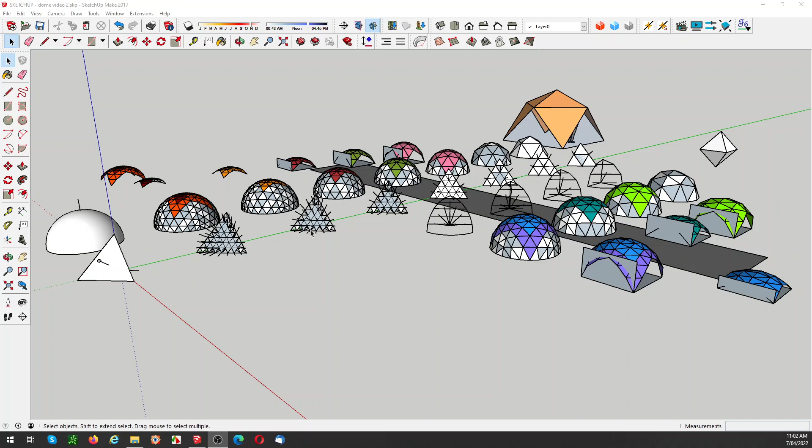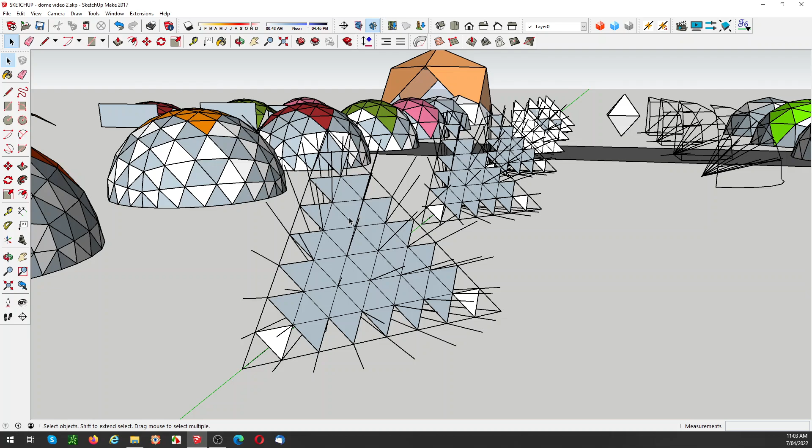So everything on the left-hand side is generated via the method I'm circling here, using the divided triangle and the grid that you can create, and what I call the porcupine or the line array, to create the structures. Not dissimilar to this, you could almost call it a hybrid system, where you make a semicircle, a quarter circle for the three axes, and then join those points of change across and create your divided lines, effectively creating a grid in that manner.

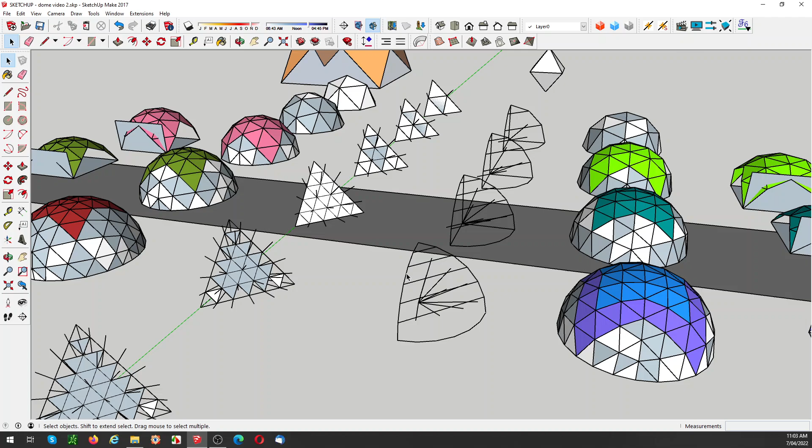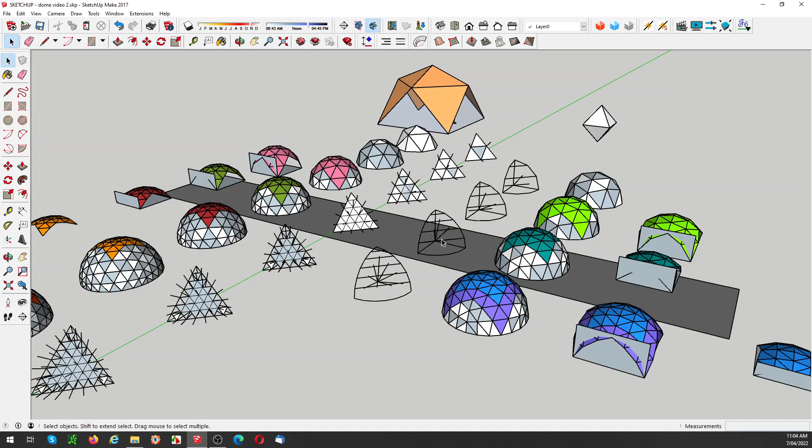Now, we've covered that in a previous video, and there are also other methods. The reason I chased down this particular rationale was that depending upon the frequency, you'll wind up with one of the frequencies, and it turned out coincidentally, and probably no real surprise if you knew what you were doing, that the 5-frequency dome of both types wound up having the support leg, what I'm going to call flush or flat in plane.

For these parts, the supporting triangle surface, i.e. the support legs for the dome, but it left part of it in this area not flat in that plane. Now you can live with that, and it's not aesthetically unpleasing,

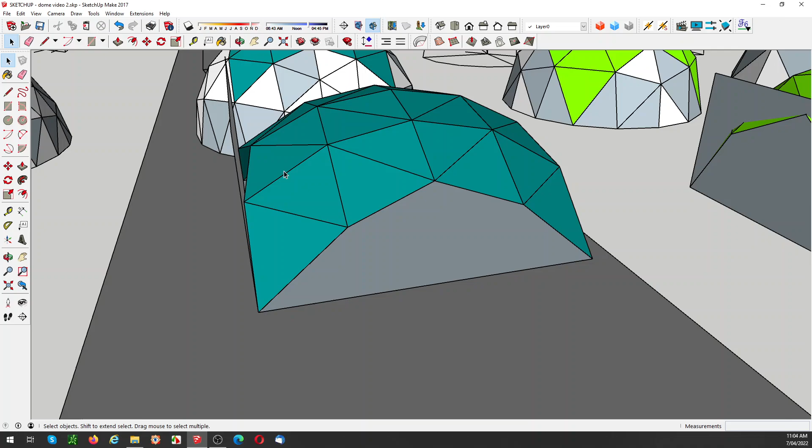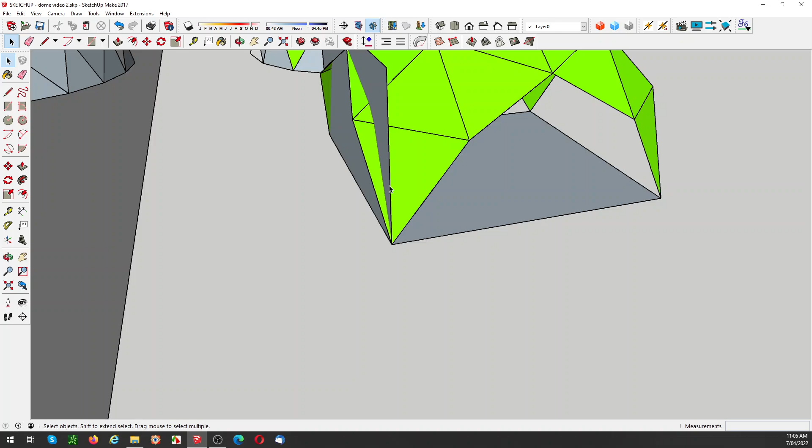but I want to have everything flush in line here, and it turned out that the exploration I chose, this is a 4-frequency dome. You can see how from that point at the bottom of the legs we've got these 1, 2, 3 surfaces projecting through the plane, that flush plane, as it were.

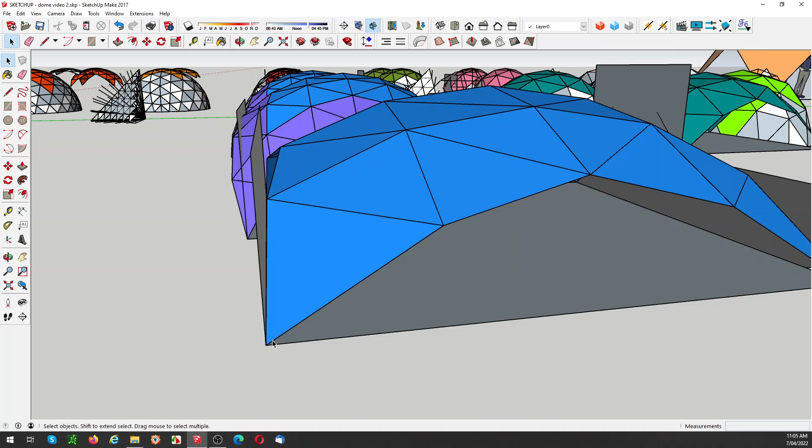You go to a higher frequency, and as you zoom in you can see that they're back behind the plane. So you've got a choice of moving the plane back to intersect here, which will mean that the leg at the bottom will project through and still not be flush at this point. So the happy medium, or the happy frequency, or the good frequency, at least in part, is the 5-frequency dome.

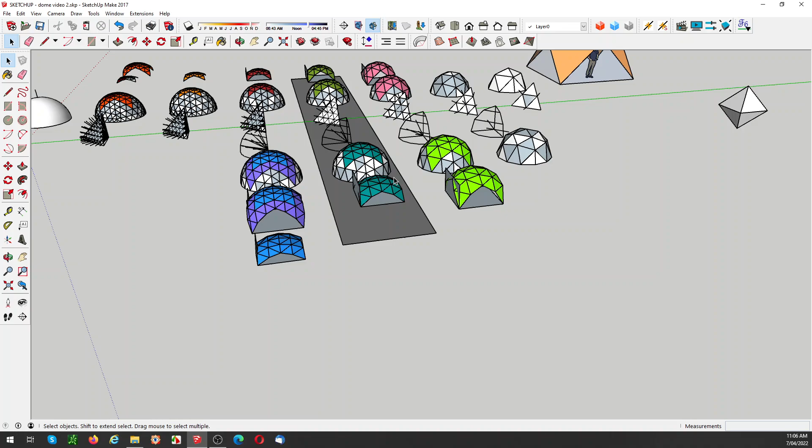But is that good enough? Is there a method of drawing and generating your geodesic lines? Is there another method? And I'm going to suggest there is, but not one that's necessarily pleasing to my brain. And it may well be that, how would you want to say it, not having your end goal as centre, you will want to try and chase down the maths or the geometry more than achieving your end goal.

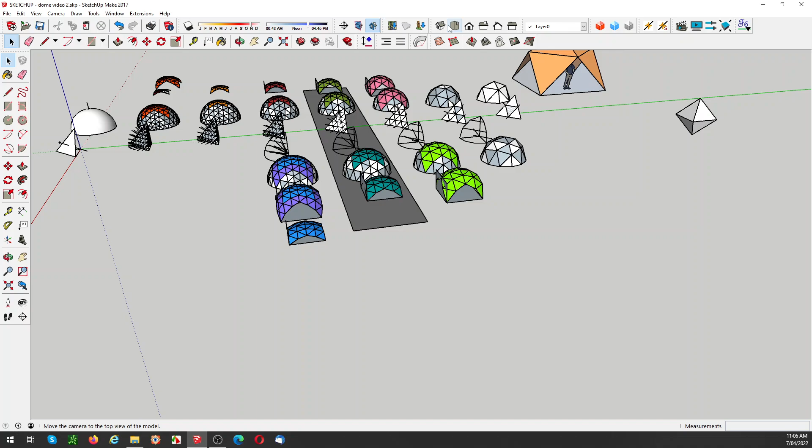Now that might be a bit silly, so I'll just show what I'm talking about here. I'll go to plan view, take the perspective off. The closer we get, concentrating on the 5-frequency dome, the closer we get to what we want, the closer we get to a grid-like layout for our geometry.

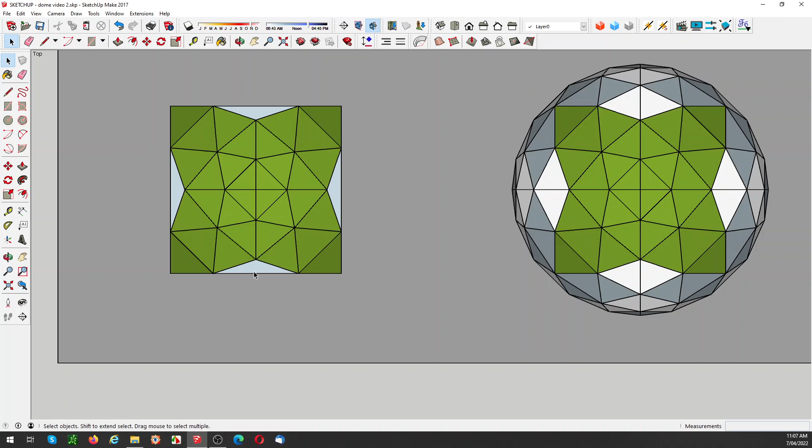This one here, we'd need to pull this intersection forward, and that's not all that hard, and I've done it in another drawing set. Equally, we come across here, we only have to pull this forward, and you probably notice this is a lesser amount that needs to be pulled forward, which is certainly my preferred option, to do the least change or modification of a basic structure.

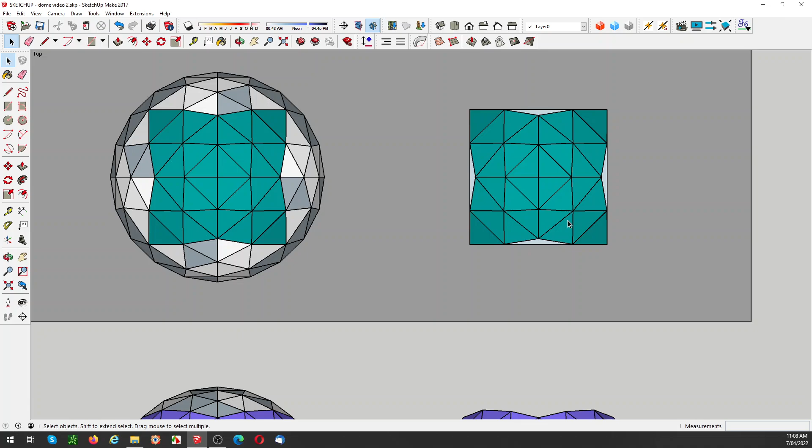So the question then becomes, why am I obsessing over trying to follow one of these similar geometry methods when I can simply create a grid-like structure and create the intersections there, or the rays, the porcupine? And that's the point. To do the grid method, getting those lines, the porcupine, is problematic.

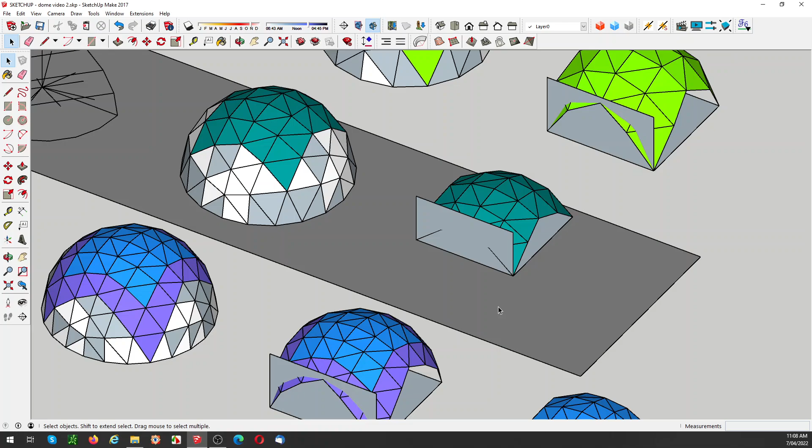So do we need a hybrid, as I might have mentioned previously, in our approach? That's a good question. Not knowing the shortcomings of that, we can proceed blindly and create a lovely structure and wind up having a structurally deficient structure because you didn't know what you were doing and the shortcomings of it. You wind up with your end result having inherent problems. I don't think that will exist a great deal. It's just getting to the point of being able to generate your ray lines, your porcupine, in a method that's acceptable and repeatable.

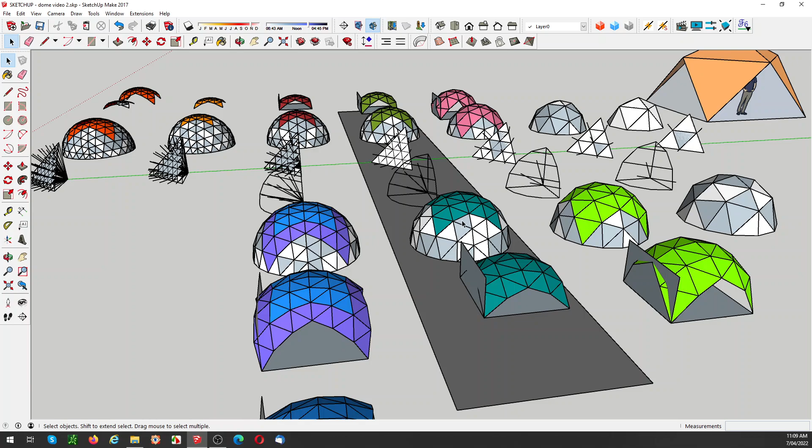The question remains. I just introduced this one. It's just a short-ish video to toss over that idea. And as I said right at the beginning, this is as much about my exploration and discovery as we go through the methods. I don't come at it as an authority, far from that.

My background in building has always been, you've got to know what you're doing before you start doing it, otherwise the unintended consequences can either be very, very costly to you or disastrous for the client, safety-wise, health-wise, and cost-wise, of course. So my reluctance to blunder blindly on, solely wanting to achieve the outcome, has to be tempered somewhat.

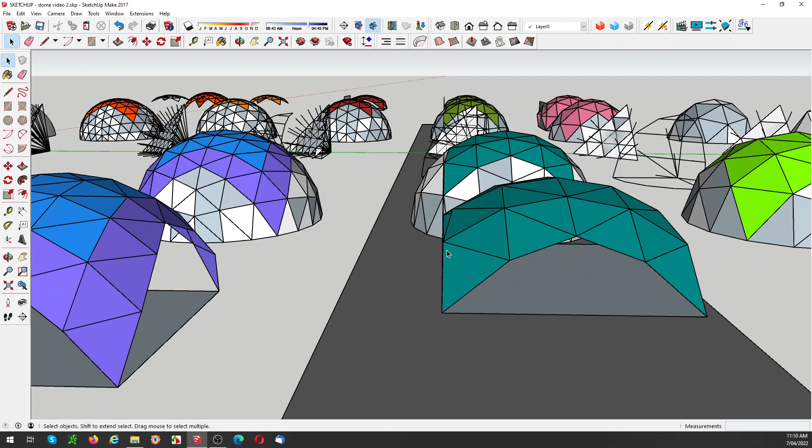So, as I said, this is a journey of discovery. Obviously, those that may, if anyone's watching these videos, have got experience, they'd be probably saying, face palming and thinking I have missed the obvious. Well, it's only obvious when you know. At this stage, I do not.

There was no great benefit for you listening to this, but you can see the development and perhaps some of the things you've got to consider too as you progress through your project. At least I'm acknowledging them, and it may help and short circuit your... This is the point, and I was considering it.

These drawings take hours to do in total by the time I've nutted out what the heck I'm doing and then physically drawn them. But you can see how to do it and recreate the method in minutes.

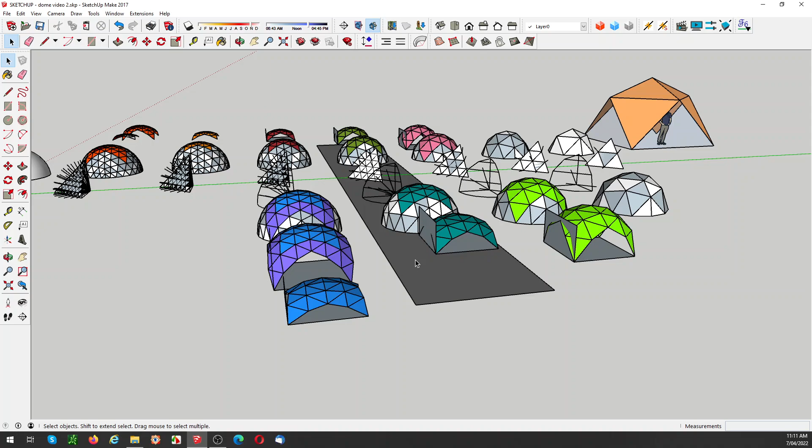Likewise, the outcome, if we can get the outcome through my blundering around blindly and come to a conclusion, that will save you many, many hours of pondering and losing patience and losing hair over what's really quite a basic sort of project, one that may or may not even be see reality, and may not get built.